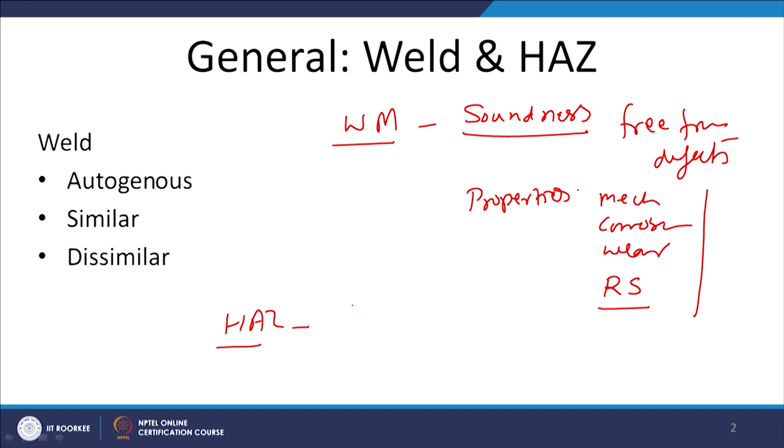zone is sound, meaning no cracks, and the kind of residual stresses present, and the kind of properties it has in terms of microstructure, mechanical properties, and corrosion properties.

Sometimes hardening takes place which leads to embrittlement, sometimes softening takes place in the heat affected zone which promotes fracture. Unfavorable metallurgical transformation in the heat affected zone lowers the corrosion resistance, and all these things happen due to unfavorable metallurgical transformations, meaning the development of microstructure.

So if we talk in the beginning about the weld metal - the weldability, when we look into weldability of metal, when we look into weld metal related aspects - a weld joint of a given metal can be produced just by fusing the faying surfaces, so the metallurgical continuity is realized after solidification.

In this case, no external metal is added. In this case, there is almost no change in composition of the weld metal.

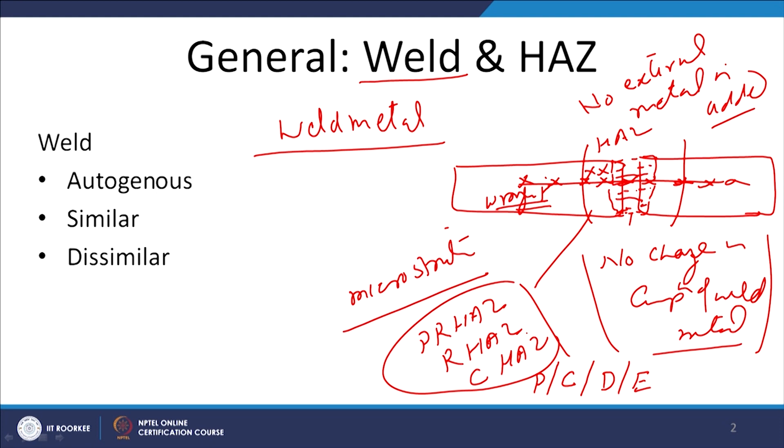Despite having the same composition, since melting has taken place, subsequent solidification and the heat affected zone which has experienced the weld thermal cycle will also have different microstructural changes. So despite no change in the chemical composition of the weld metal, whenever a base metal is welded by the fusion welding process, there is always a structural variation, and depending upon the characteristics of the metal, there can be softening or hardening, depending upon the kind of metallurgical transformations taking place in the weld zone.

For example, most metals like precipitation hardenable systems, work hardenable systems, and dispersion hardened systems, when welded by the fusion welding process, mostly we see even for autogenous welding, where no change in chemical composition of the weld metal is taking place, just the faying surfaces are fused, the weld metal is found to have poorer mechanical properties due to unfavorable metallurgical transformations as compared to the base metal.

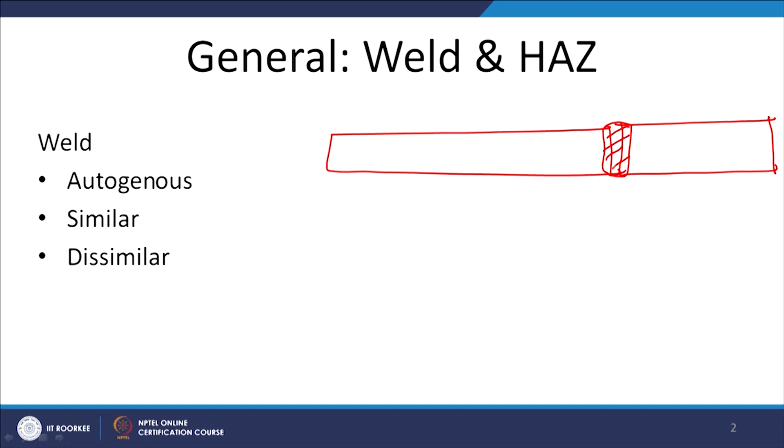Now, sometimes autogenous welding is not possible due to difficulties associated with through thickness penetration. By using laser welding and electron beam welding, we can weld thicker sheets and realize through thickness penetration to ensure the faying surfaces are brought to the molten state. But still in those cases, even without change in composition, a lot of structural modification in the weld metal results in changes in mechanical properties, which may be in the form of hardening or softening of the weld metal.

But sometimes it becomes mandatory to prepare the edges of the plates to be welded through suitable edge preparation, and in that case it is required to fill up this gap using a suitable filler. So consumable electrode welding processes are used, or in non-consumable welding processes like gas tungsten arc welding, plasma arc welding, we have to use filler from outside.

So this filler or the consumable electrode can be of two types. Filler or electrode composition can be almost similar to that of the base metal, or it can be completely different from the base metal. In most cases when there are no major metallurgical issues and weldability issues related with the base metal, mostly the matching filler or electrode metal is used.

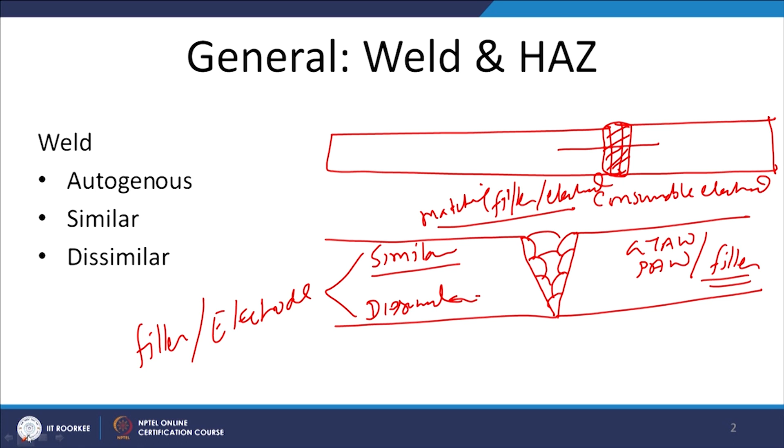But if you want to address some specific technological aspects related with the poor weldability of the base metal, then we choose the dissimilar or completely different filler metal or electrode.

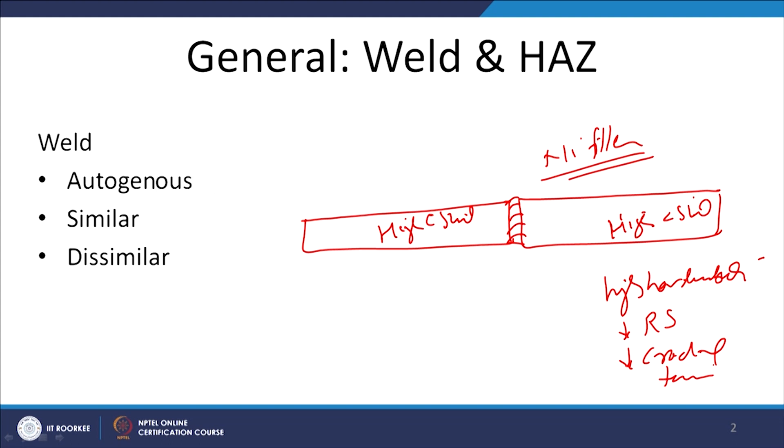Like say, high carbon steel plates are sometimes welded using austenitic stainless steel or nickel based fillers, in order to overcome issues related with high hardenability, lower down the residual stresses, reduce the cracking tendency, or to have the weld metal with a better combination of properties than the base metal.

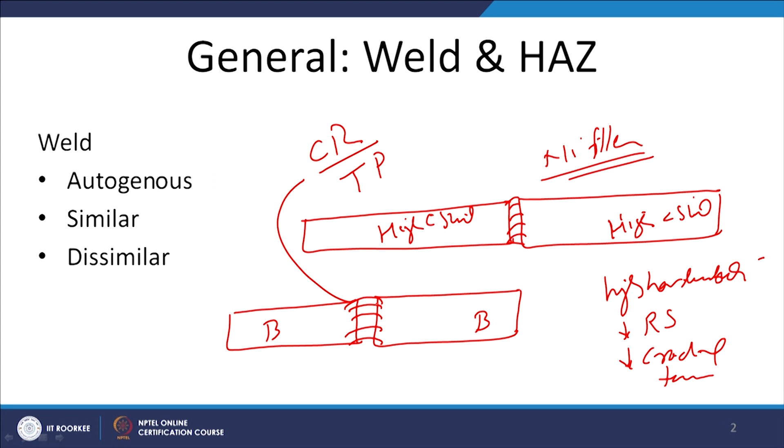So in that case we choose the suitable filler which will offer the required combination of properties, which may be in terms of good corrosion resistance, required tensile properties of the weld metal, or required wear resistance. So we can choose the filler or electrode composition suitably, so that it has the required set of properties for the weld metal.

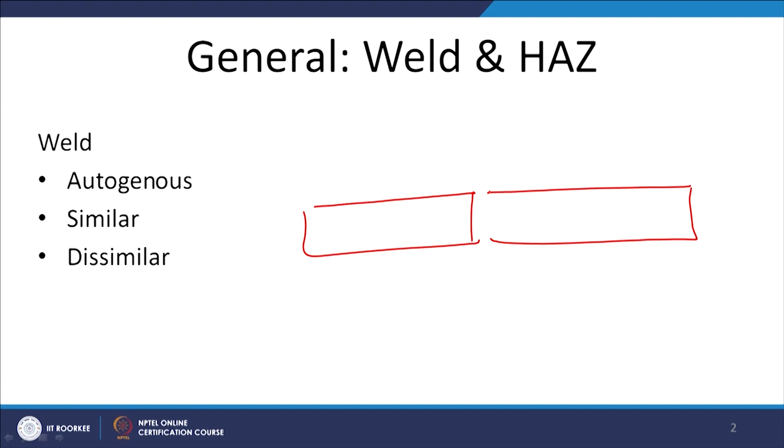So considering this aspect, at least we have the flexibility in case of fusion welding processes, where either a consumable electrode is used or filler is used from outside. We have the flexibility to select the suitable filler, so that the weld metal composition can be regulated accordingly in order to have the required microstructure, mechanical properties, corrosion resistance, wear resistance. This allows us to use either similar or dissimilar metals to satisfy the requirement of weld metal properties.

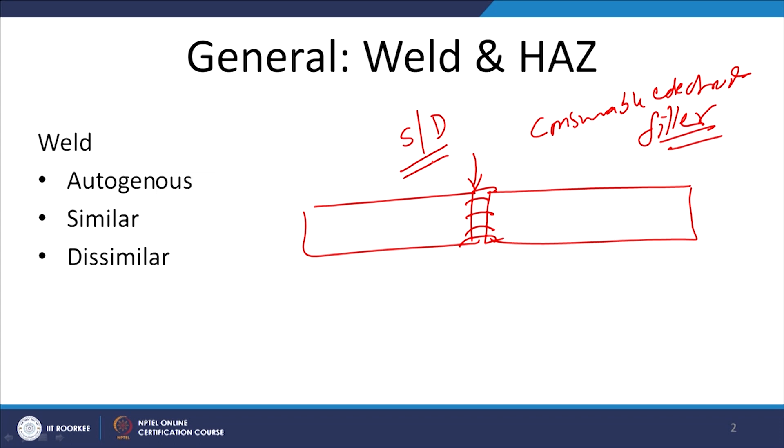But if we talk of heat affected zone related aspects, then certainly whenever heat is supplied to facilitate the fusion of the faying surfaces, a zone near the weld metal is formed, and this heat affected zone - we cannot do much to eliminate it, because in fusion welding processes it is always there. Size of the heat affected zone can certainly be reduced by using high energy density welding processes like laser beam or electron beam, but this zone will still be there.

The width of the heat affected zone certainly can be reduced. So, from the weldability point of view, we have the luxury, at least in case of welding thick plates, where we can use a filler or electrode of one composition or another in order to adjust the properties of the weld metal.

We can have a situation where either the corrosion resistance or the tensile properties of the base metal are very poor, like corrosion resistance of the base metal in terms of MPY is just 5 MPY. This is the typical unit to show the corrosion resistance or corrosion behavior of the material, and say tensile properties in terms of yield strength is just 300 MPa, with percentage elongation just 20%.

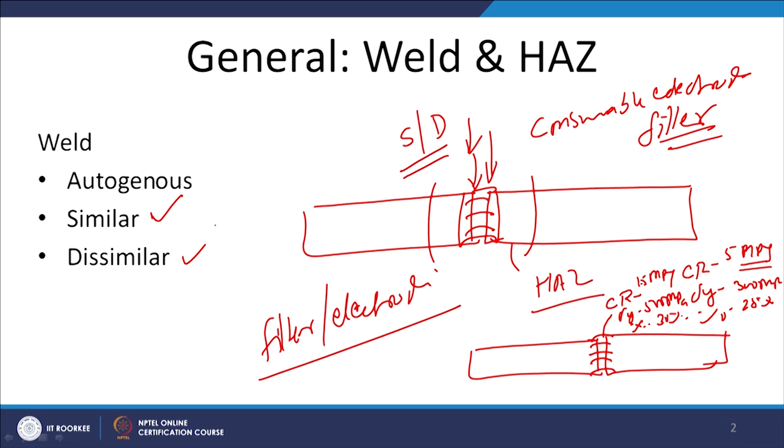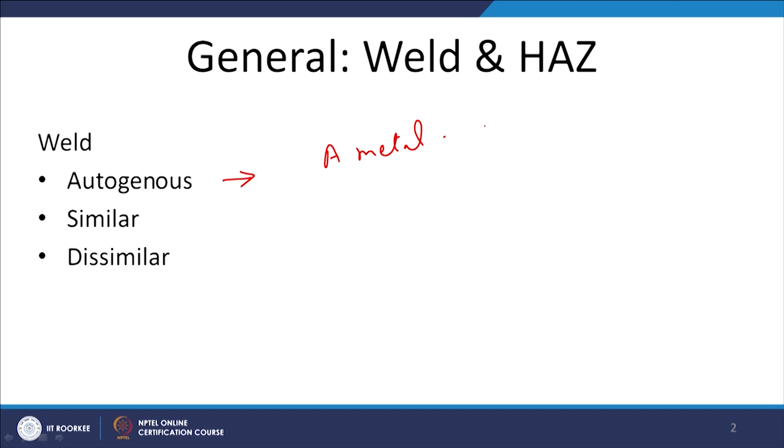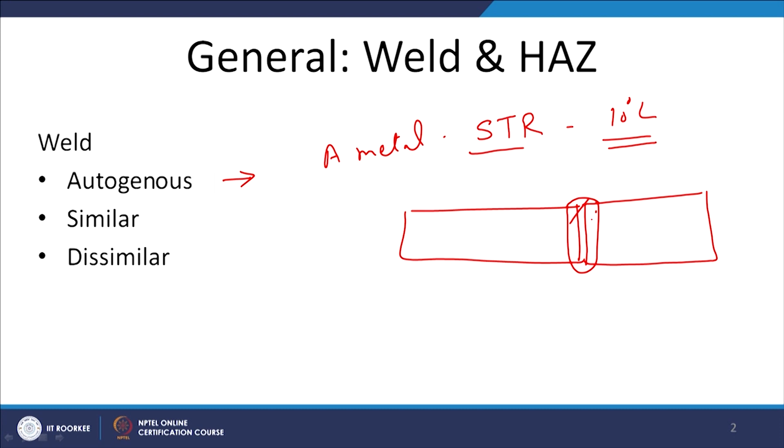There are some issues with the autogeneous welding process as far as weldability is concerned. For a metal having a solidification temperature range of just 10 degrees, the issues related with the weld metal are very limited, especially with regard to solidification cracking. But when the solidification temperature range becomes very wide, even autogeneous welding does not help to eliminate this problem.

If the solidification temperature range is very high, say 150 degrees centigrade, then even simple fusion welding or autogeneous welding, where just the faying surfaces are brought to the molten state and subsequently solidified, sometimes leads to solidification cracks at the center of the weld.

So in order to avoid the weldability issues related with higher solidification temperature range, sometimes autogeneous welding is avoided, and we try to weld the base metal using a suitable filler, so that the solidification temperature range can be reduced, say from 150 to 25 degrees centigrade. In that case, the solidification cracking tendency will be reduced because of the reduction in solidification temperature range.

The mechanism of solidification cracking I will talk about subsequently, but what I am saying is that direct melting of the base metal may not always be feasible if the metal has a wider solidification temperature range, or due to high hardenability it leads to embrittlement of the weld metal. So it will be better to use an electrode or filler metal of lower hardenability, like austenitic stainless steel or low carbon steel filler.

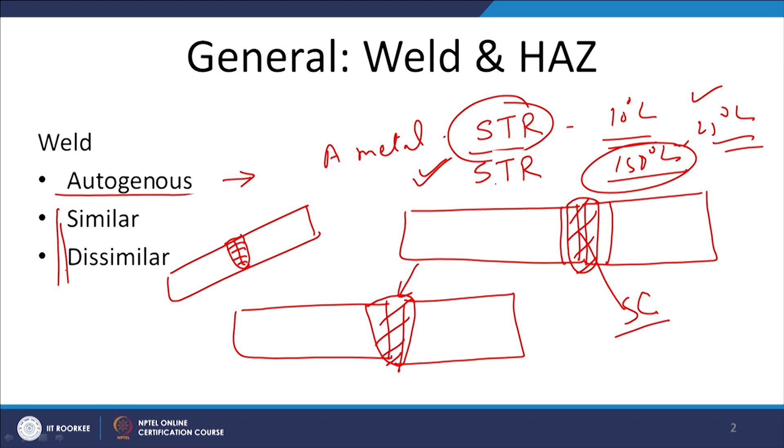As I have said, we have the option to regulate or adjust the composition as well as the weld metal properties by choosing either a matching filler metal or a completely different kind of filler metal, so that weldability related issues of the base metal can be reduced.

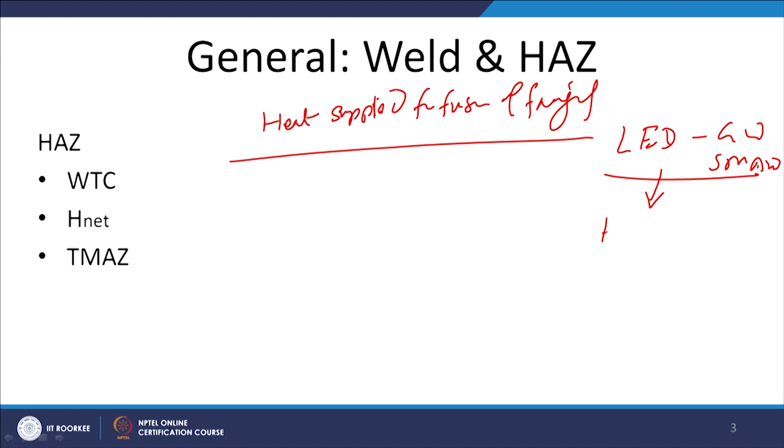But we cannot do much as far as heat affected zone development is concerned, because it is directly affected by the amount of heat being supplied for fusion of the faying surfaces. So low energy density processes like gas welding or shielded metal arc welding will be supplying higher heat. So heat input will be more, and that in turn will lead to a wider heat affected zone.

So in order to reduce the adverse effects associated with the heat affected zone, it is always favorable to work with high energy density processes like electron beam welding, laser welding, or plasma arc welding. These processes will require lesser heat input.

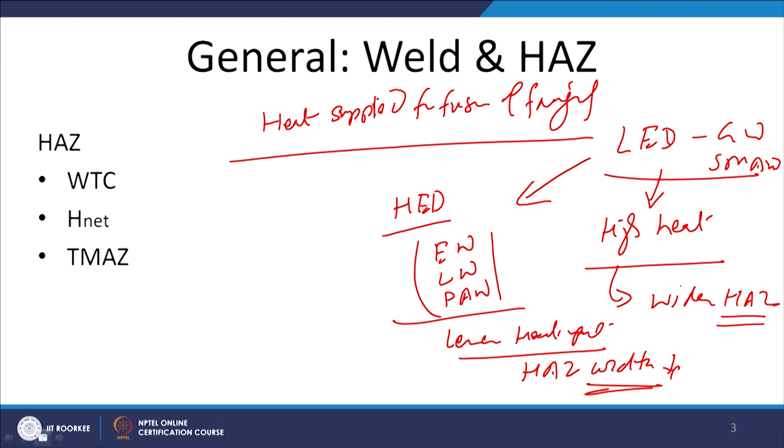So, the heat affected zone (HAZ) width in that case is reduced, and that in turn will help in addressing the issues to some extent which are associated with the heat affected zone. So, heat affected zone issues cannot be eliminated, but certainly they can be reduced to a great extent.

The HAZ characteristics to a great extent depend upon the kind of weld thermal cycle being experienced by the base metal in the heat affected zone. Heat affected zone is the zone or width up to which the base metal properties are being affected metallurgically and mechanically. That width is called heat affected zone, and it will directly depend upon the amount of heat being supplied, that is, the heat input.

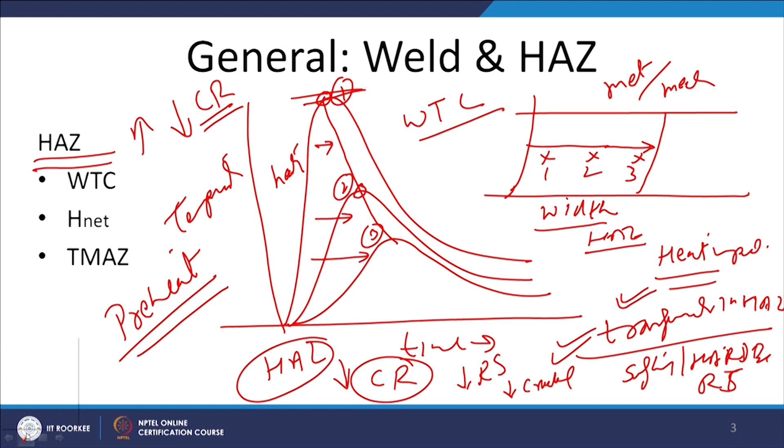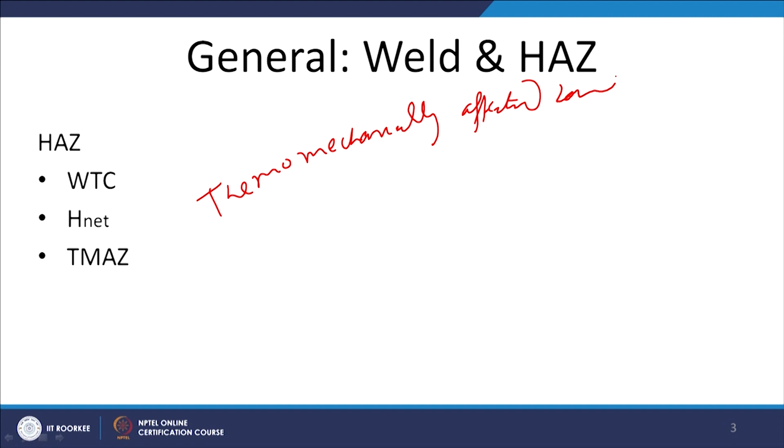affected zone is also formed. This is a typical characteristic of processes where controlled plastic deformation is used for welding. So, all those solid state joining processes like friction welding, friction stir welding, ultrasonic welding, and explosive welding—in friction welding and friction stir welding macro scale plastic deformation is used, while in ultrasonic and explosive welding micro scale plastic deformation is used.

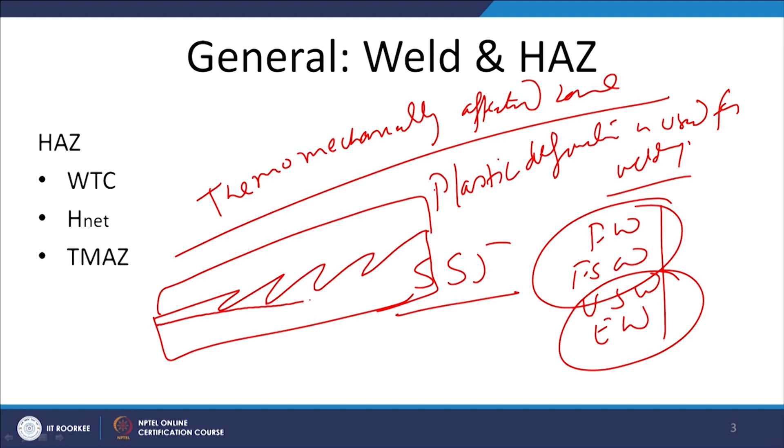Whenever this kind of deformation occurs, we notice that the interface is deformed like this. This deformation at the interface leads to the formation of a zone which has the effect of deformation as well as heat, and that is why it is called the thermomechanically affected zone. This is the typical characteristic of ultrasonic welding and explosive welding.

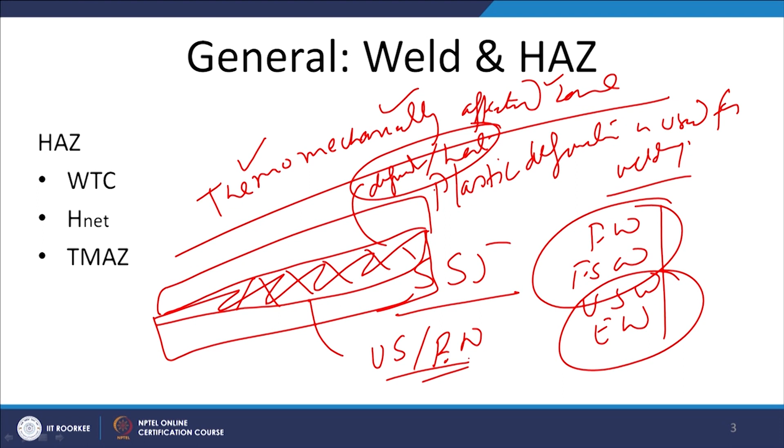But in case of friction stir welding, complete recrystallization of the weld nugget takes place, while next to the weld nugget we find a very little zone which has the effect of both heat and deformation. The zone which is completely deformed, fractured, and refined is called the weld nugget in FSW, while the zone next to the weld nugget experiences both the effect of heat and the effect of deformation, which is why it is called the thermomechanically affected zone.

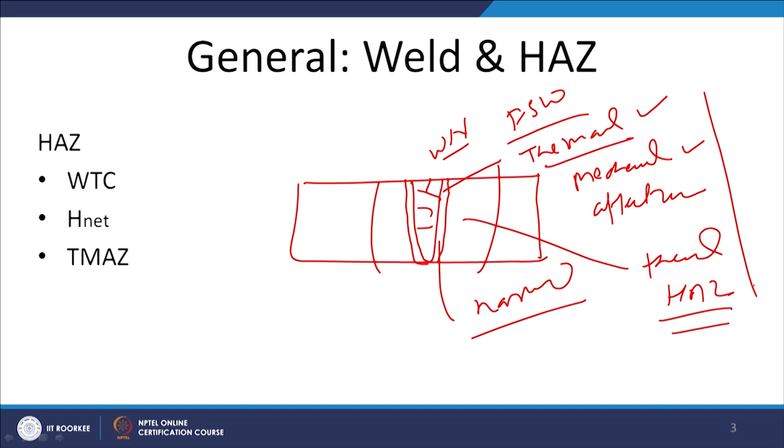This zone is very narrow, and thereafter a region is formed which is affected only by the heat being transferred from the weld nugget to the base metal—that is the heat affected zone. So, sometimes we get the thermomechanically affected zone apart from the heat affected zone also. So now we know that the heat affected zone experiences various weld thermal cycles as per the metal system.

It may experience recovery and recrystallization in case of work hardening metals, grain refined metals, dispersion hardened metals, even transformation hardened metals, and solid solution strengthened metals.

This is very common, that the heat affected zone due to the weld thermal cycle will be experiencing recovery as well as recrystallization, but thereafter the metallurgical transformations in the heat affected zone occur, like in form of reversion or dissolution of precipitates, or transformation in form of ferrite and pearlite transformation into martensite or bainite.

Reversion and dissolution will be causing the softening, while the transformation hardening will be causing the hardening of the heat affected zone. Sometimes this will depend upon the kind of strengthening mechanism which is involved.

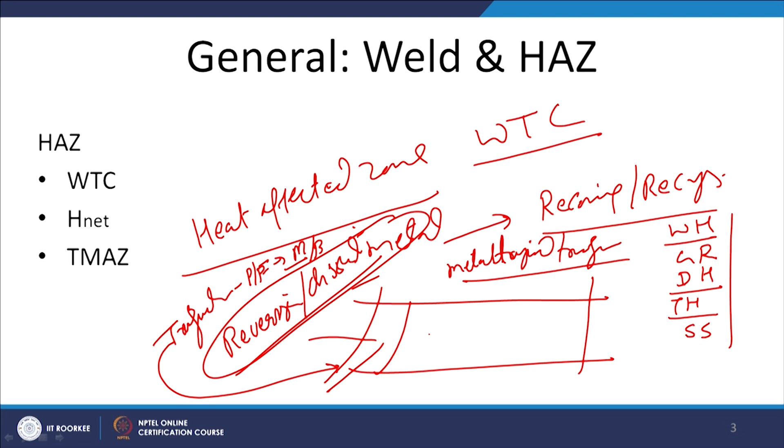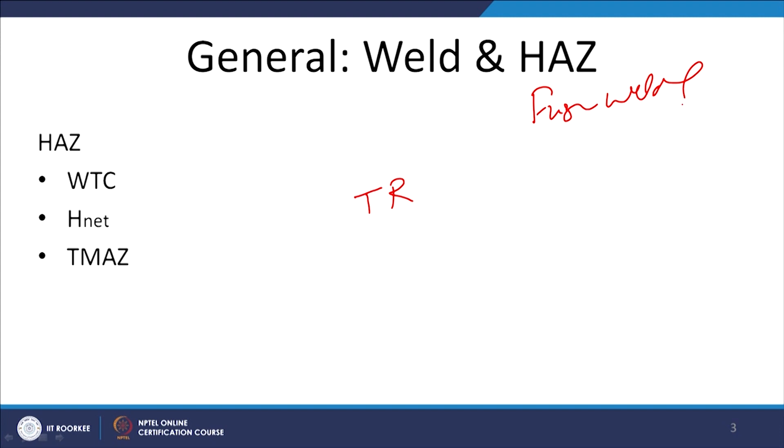Apart from these, the heat affected zone also experiences, in case of fusion welding processes, tensile residual stresses. So if the metal system is hard, brittle, with low percentage elongation, then tensile residual stresses sometimes lead to cracking.

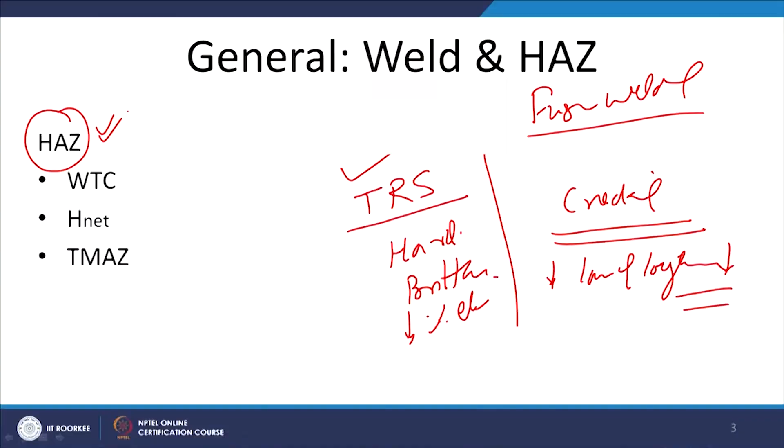In the heat affected zone, it also leads to loss of toughness. So it is important to consider the way by which heat affected zone properties are affected due to the weld thermal cycle being imposed during welding, to assess the weldability of the metal. Since the weldability of metals considers the properties of the weld metal as well as the heat affected zone.

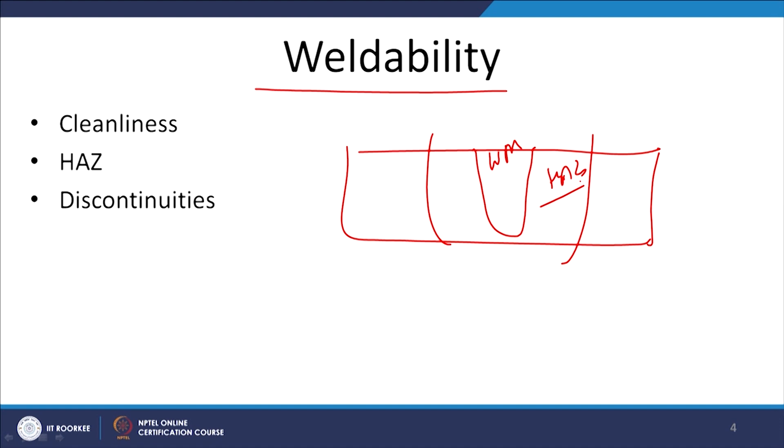So we need to consider three aspects: whether the weld metal is clean or not. Clean means it is free from slag or flux inclusions or not. That will depend upon the kind of affinity a weld metal is having with atmospheric gases.

The metals which have greater affinity with atmospheric gases will have greater tendency for formation of oxides and nitrides, and so to take care of them more slag is formed. Increased slag formation means increased tendency for their entrapment in the weld metal, which in turn reduces the cleanliness of the weld metal.

So those metals which have less affinity to atmospheric gases will be cleaner and pose lesser issues related with weldability. Likewise, consider the way heat affected zone properties are affected.

There are some metals which are not much affected by the heat of welding in the heat affected zone, so they will offer better weldability compared to metal systems which either experience softening, hardening, increased cracking tendency, or reduced corrosion resistance. So if the heat affected zone properties are adversely affected, they will have lower weldability compared to others whose properties are not much adversely affected due to the heat applied during welding.

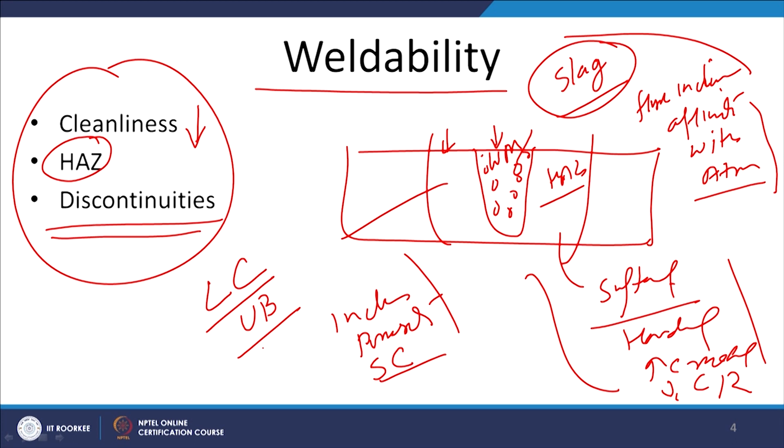Likewise, weld discontinuities can happen in the heat affected zone as well as in the weld metal. In the weld metal there can be inclusions, porosity, and solidification cracks, while in the heat affected zone there can be liquation cracking, underbead cracking, lamellar tearing. So there are various types of cracking which can occur in the weld metal as well as the heat affected zone, which can reduce the weldability of the metal.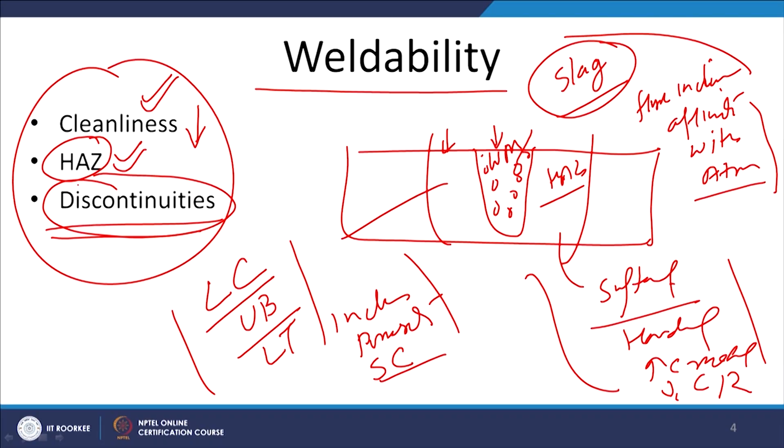So what we have to see for assessing the weldability of the metal is how clean the weld metal is, how the HAZ properties are being affected, and the kind of discontinuities being formed when a metal is welded, so that we can have a fair idea about the weldability of the metal.

Now I will summarize this presentation. We have seen what are the different aspects we should look into to assess the weldability of metals, and there are two main areas as far as property consideration is involved: the properties of the weld metal and the properties of the heat affected zone. This includes the cleanliness and discontinuity of the weld metal, discontinuities formed in the weld metal as well as heat affected zone, and the heat affected zone properties. Thank you for your attention.